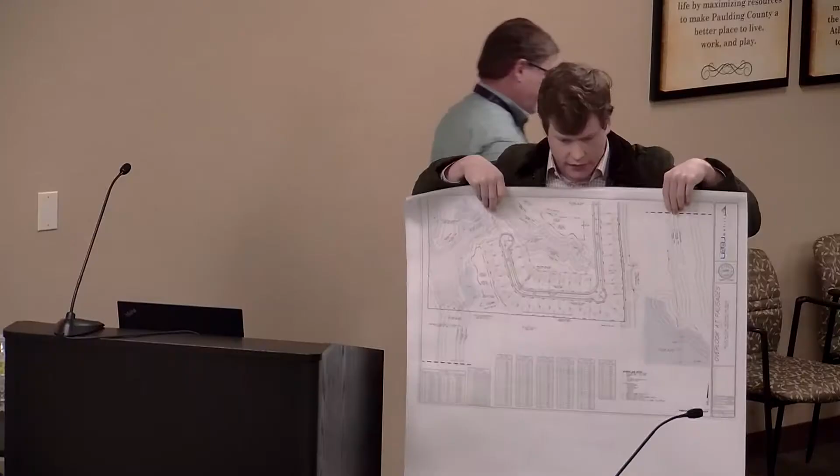Let's see here. So it's actually on 2 pages. This is the further south portion of the site, and this is the north half of the site where the proposed entrance is. It's kind of hard to see from here, but we have included a right turn lane, decel lane on the entranceway.

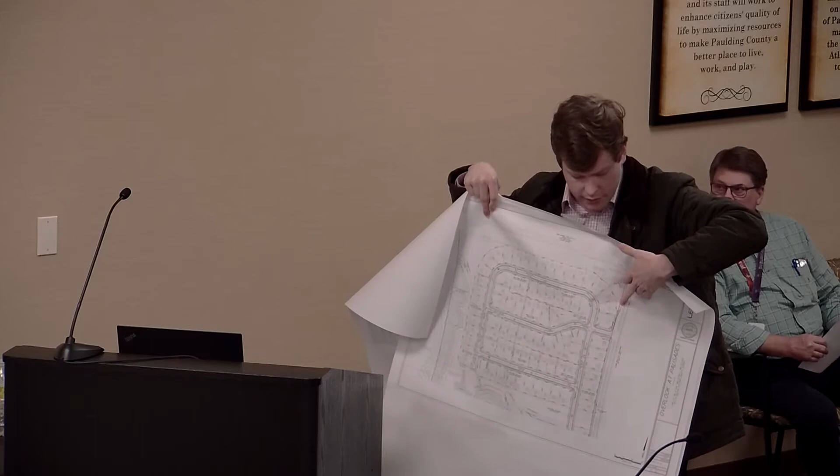So with that being said, thank you for your time and consideration. I'll let Mark go through the details on his report.

Good afternoon. My name is Mark Akampora. I'm the traffic engineer that did the assessment of the access for this project.

There were 3 things that were asked for the access: a southbound right turn lane, a northbound left turn lane, and moving the access further away to the south along Paris Road, away from US 278. I'll tackle each one. The southbound right turn lane, the applicant has agreed to put in, so they're not asking for a waiver for that anymore. In my report, I recommended they put in the right turn lane, and they agreed that was something that should be done.

Basically, all of the traffic is going to come from US 278. To the south of this project, the road dead ends into a subdivision, so any northbound left turns into the site would be people just coming from that subdivision, which is going to be negligible. It might be a mail delivery truck delivering to one subdivision and going to the other, or a UPS truck, or a friend coming from one subdivision to the other. But there's not going to be any regular flow of traffic coming in northbound left, because that road dead ends to the south into that other subdivision.

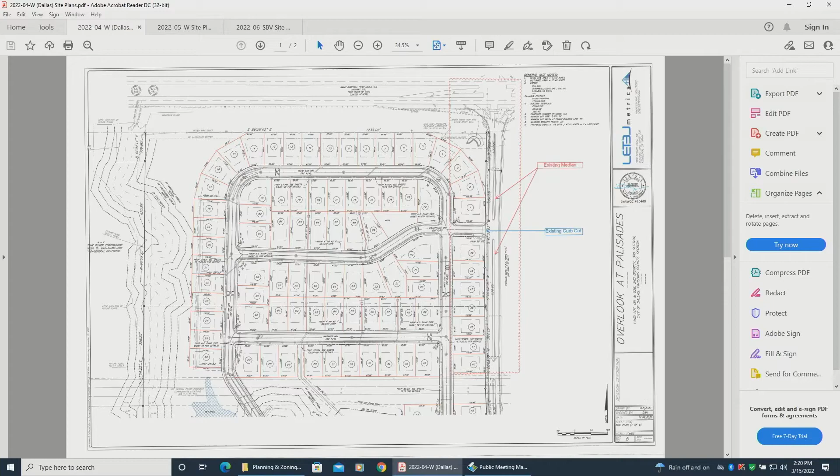So the optimal sight distance point is where the median break is, where the applicant is asking to put their access. There's already a median break and a curb cut there, so it's my recommendation that they leave the access at that point. That access is sufficiently far from 278 that there's no expectation of any queuing backing up to 278, especially when a southbound right turn decel lane is built to turn right into this site. There should be no impedance to through traffic, and there should be no queuing back to 278. So my recommendation was to leave the median break where it is, where the applicant is requesting to put their access.

One recommendation I did add is that there is a narrow landscape median with some vegetation in it that could impede sight distance. So I made the recommendation to make sure the vegetation is cleared in both directions so there's no impedance, and that sight distance is available.

Other than that, my recommendation is to build the right turn lane, please waive the need for the left turn lane, and leave the median break and access where it is requested. I have a report and numbers, and I'd be happy to explain that in more detail, but that's the gist of the request. Thank you.

The request we're looking at today is just the recommended left and right turn lane. Is it my understanding that the applicant is agreeable to installing the right turn lane, and therefore not asking for a waiver for that? Correct, yes. The only other item we have advertised is the left turn lane.

I think, and George, I'll defer to you, but I would think the location of the curb cut is something that would occur in plan review, not here—that's something we cannot address today because it wasn't advertised. Exactly. That's kind of more of the Development Control Committee.

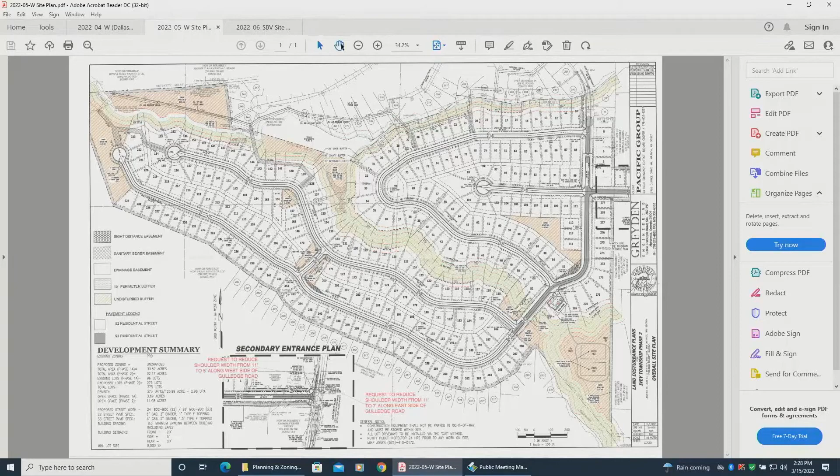Is there a way to pull up the actual drawing? Yes, just scroll. There was one more we submitted that has more of a blow-up of it. That's the only one I had. All right, maybe I can zoom in on here? You can scroll. Should be able to... Yeah, I can't zoom in on that. Trying to just zoom in on that part. That right there, that's the... All right, it's still a little hard to see.

The right here is where we're requesting a reduction right along this decel lane. And then from where the taper ends here to where the taper ends over here is where we're requesting the reduction in shoulder. And then it gets bigger and goes back to the existing shoulder.

Okay, thank you. You could just have a seat and we'll call you back up in a minute. At this time, I will ask if there was anyone present who would like to speak on behalf of this application. Is there anyone who would like to speak expressing opposition, concerns, or questions regarding this application?

Yes, there is. So just sign in on the sheet, state your name, and address all comments to me.

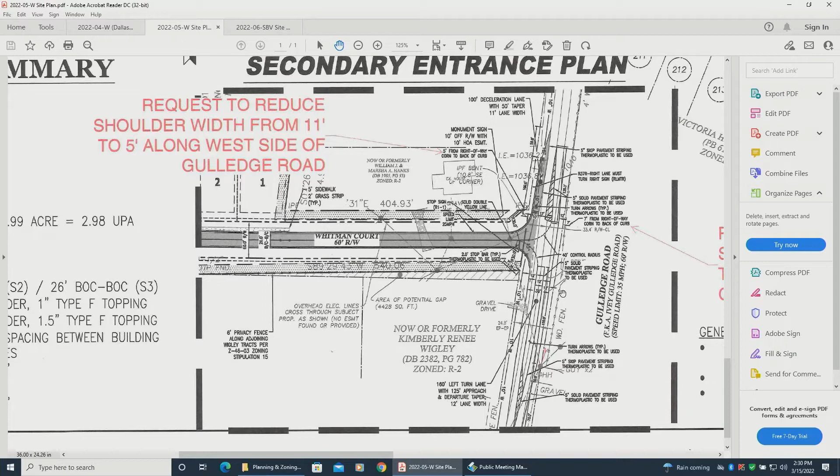My name is Brett Wigley, and I am the owner of the corner of that property right there where he's talking about. The biggest issue we have, well, one of the biggest issues, is traffic on that road. It is ridiculous. And that's going to put that turn lane right dead in front of my house to enter the subdivision.

And already right now, it's like playing Frogger to get to your mailbox, because there is a super sharp curve that is not really showing too much in that picture right there, with a deceleration lane. It's my neighbor's, which is Bill - he'll be coming to talk to you in a second. But that's already a dangerous curve right there, and talking about putting an entrance right in that curve is going to be dangerous for anybody crossing the road to get to your mailbox.

Really, I don't want it. I mean, I've been there for 37 years in that house. I've lived on that road for 54 years, when it was a dirt road. I don't know what all comments I could say about it, because that's actually going to put the entrance to that subdivision right beside my house. And with a proposed 735 homes, that is a lot of traffic in your front yard.